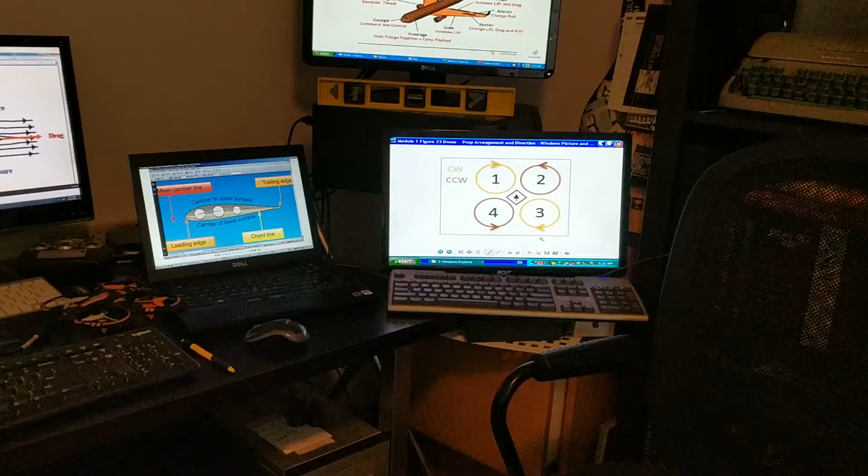Module 1, Aerodynamics. So, on the very start, we would like to let you know aerodynamics is more like the underpinnings of aviation.

And having said that, I'd like to ask this question, but please don't sue me or take me to court. Have you heard this saying? If you ask a bank robber why he robbed a bank, he replies, that's where the money is. With drone development happening by the minute, I would say aviation is where the money is.

And having said that, I'm going to give you another example. I know you are my students and not my wife. She would tell me, why don't I get into the subject rather than going into a tangent? But this is important.

What have you heard about the reputation of a commercial pilot? I'm not talking about the prestige part of it, but the work ethics, accountability, discipline, and skill set of a commercial pilot that has made a mark in society.

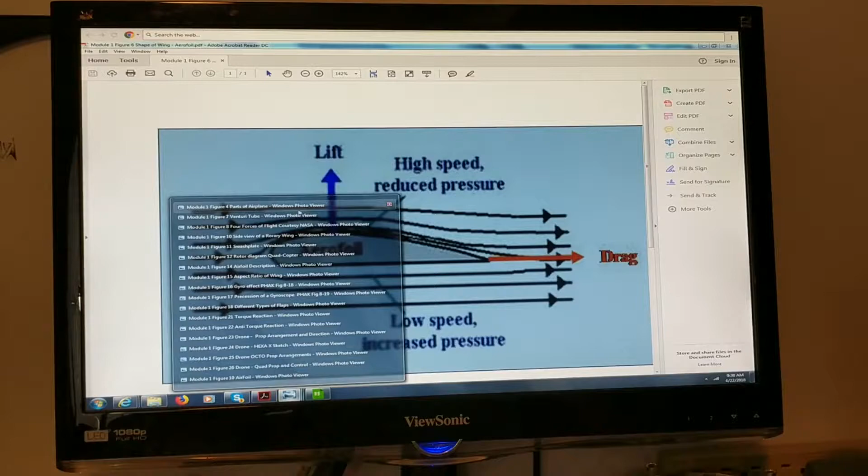Figure 4, once again, like this you may not see perfectly, but you would see in figure 4, airplane parts. This is a NASA image, and we'll be describing that in a lengthy way.

Different parts of an airplane, or different gadgets, or different surfaces - we'll be going into detail on that through different figures. Figure 5 will cover different names of activities, controls, and other descriptions, so that any identification given, all students would know what we're talking about. Figure 6 has the shape of the wing.

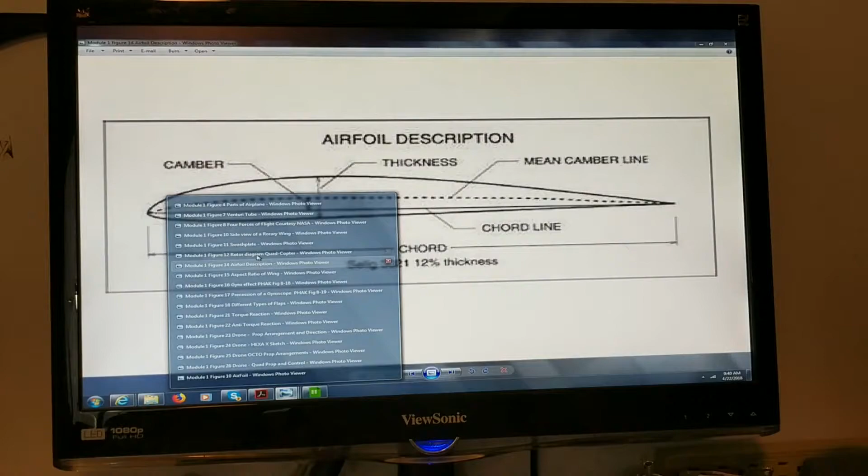Shape of the wing - we'll be dealing with that at length.

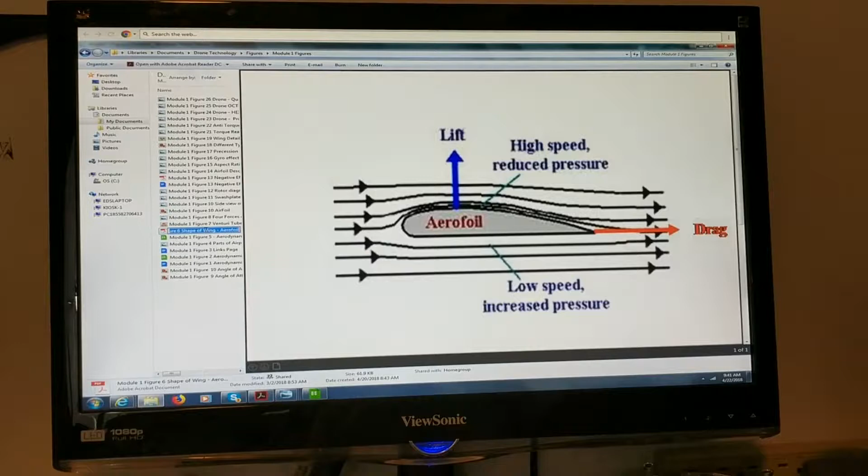And figure 7, that's the Venturi tube.

Figure 8 shows the four forces of flight, which we have to deal with at length.

Figure 9 deals with the angle of attack.

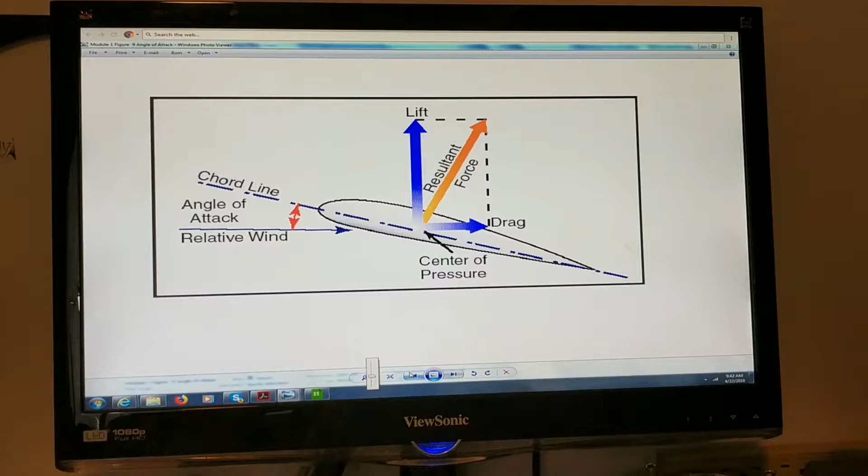Figure 10 shows a side view of a rotary wing on a helicopter.

Figure 11 shows the swash plate, which we will deal with and understand in a proper way, with a solid understanding - we need that.

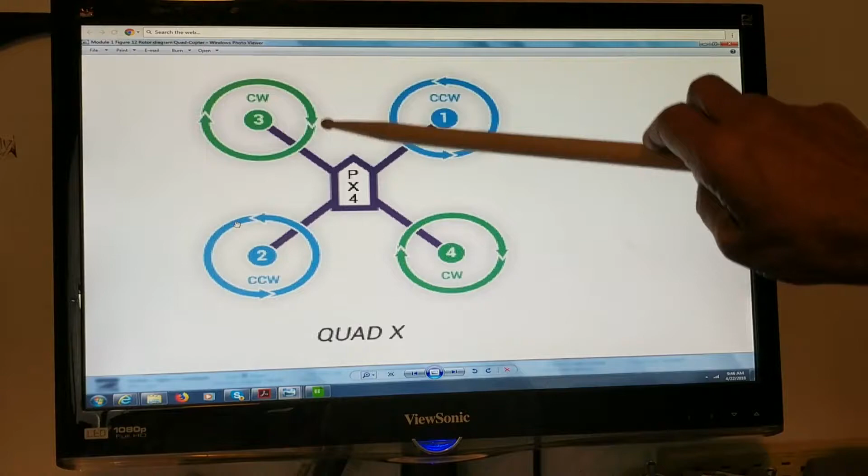Figure 12 gives a rotor diagram of a quadcopter, indicating the directions - we have another diagram coming up later. Rotor number 3 and rotor number 4 are clockwise, while rotors 2 and 1 are counterclockwise. We'll get into that as we go on in the course.

Figure 13 lists the negative effects of excessive weight, which we will discuss through and through.

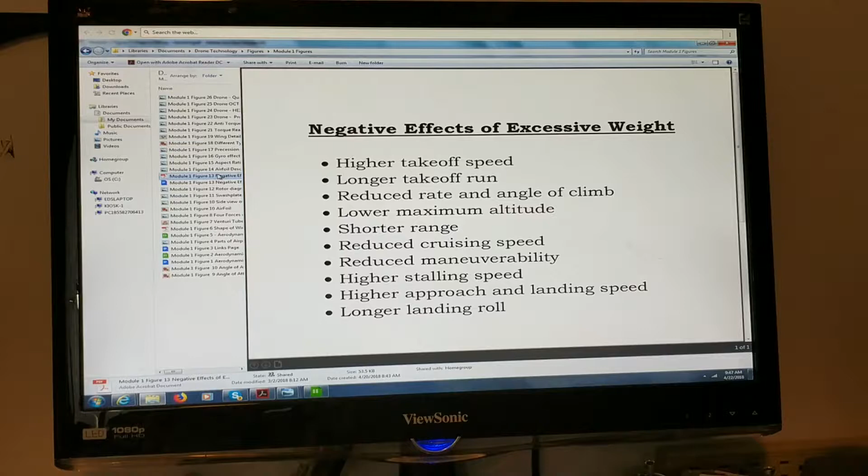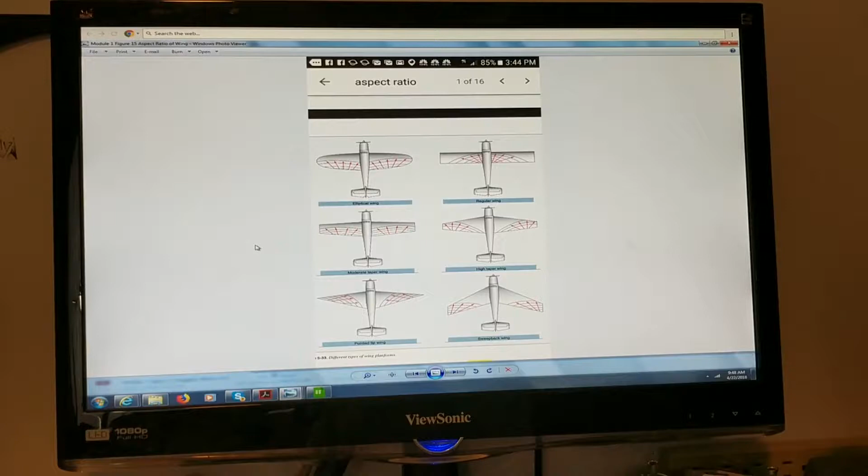Figure 14, once again, covers the description of the airfoil and understanding these names: camber, thickness, mean camber line, and chord, etc. Figure 15 will show the aspect ratio and different wing shapes - a detailed discussion would be done with that.

Figure 16 shows the gyro effect, which we'll deal with, and figure 17 shows the precession of the gyroscope.

Figure 18 deals with different types of flaps. Figure 19 will have the cross section of the wing with more identification when dealing with the angle of attack. These names will keep coming up.

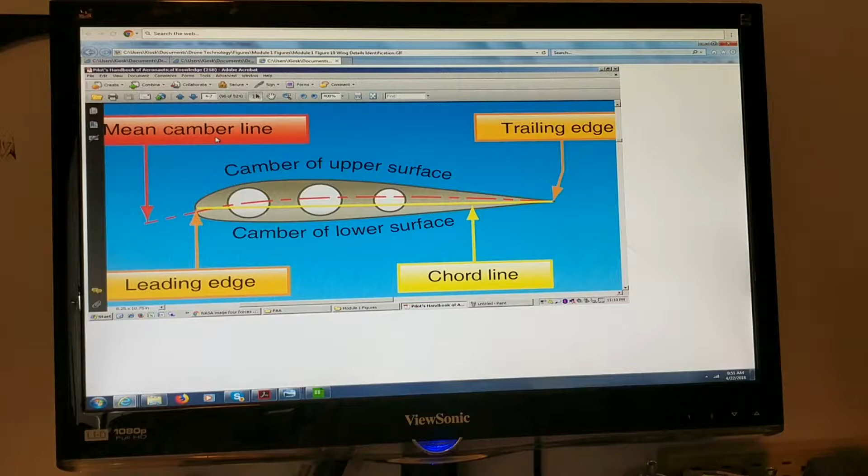Figure 20 shows the adverse yaw.

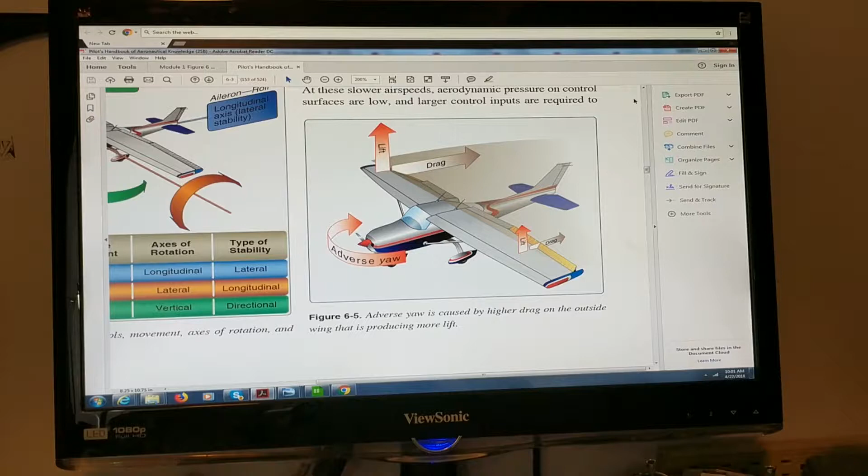Figure 23 is helpful to understand how the props or motors on a quadcopter are arranged to rotate in clockwise and anti-clockwise directions.

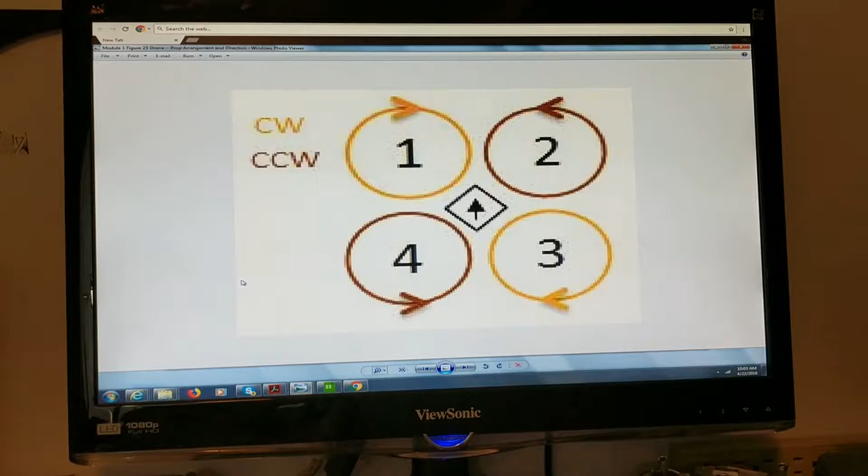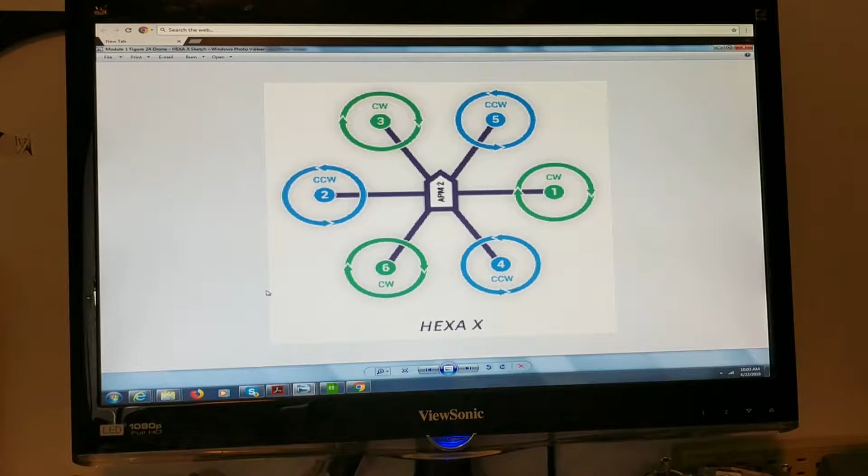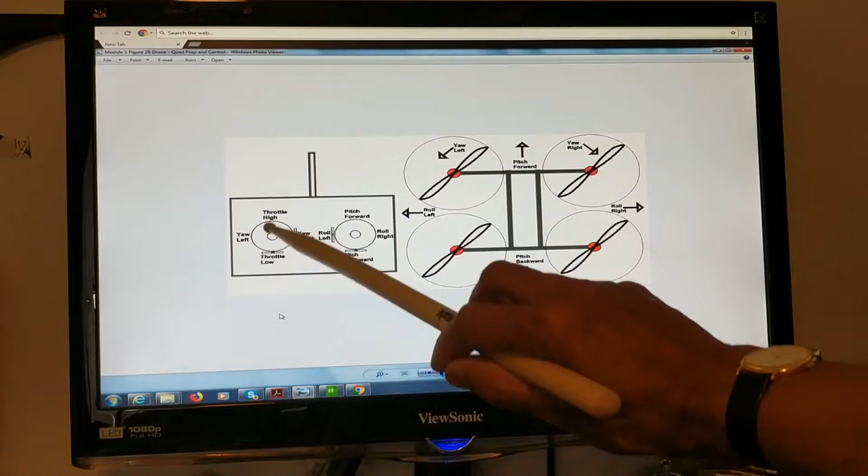The last one, figure 26, shows the arrangements of the controls and props of a quadcopter in the mode 2 arrangement - that's the more common one, though most controls now are switchable between mode 1 and other modes as development happens rapidly. Here, if you observe, the throttle is on your left hand side, and we're going to get into details of that.

As we start, there are a few basic things we have to cover, mainly Newton's first law and Newton's third law of motion. The first law says all objects remain at rest or travel in a constant path at constant velocity unless compelled otherwise by forces acting on it. Newton's third law states that every action has an equal and opposite reaction.

We have to couple this with Bernoulli's theorem and the Venturi tube to understand how the shape of the wing and the pressure difference between underneath the wing and on top of the wing help an aircraft take to the air. It's also equally important to understand pressure - it's very interesting.

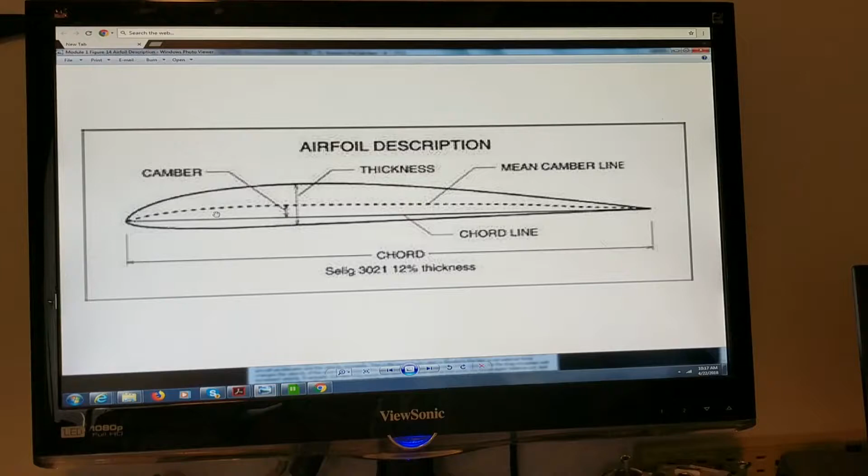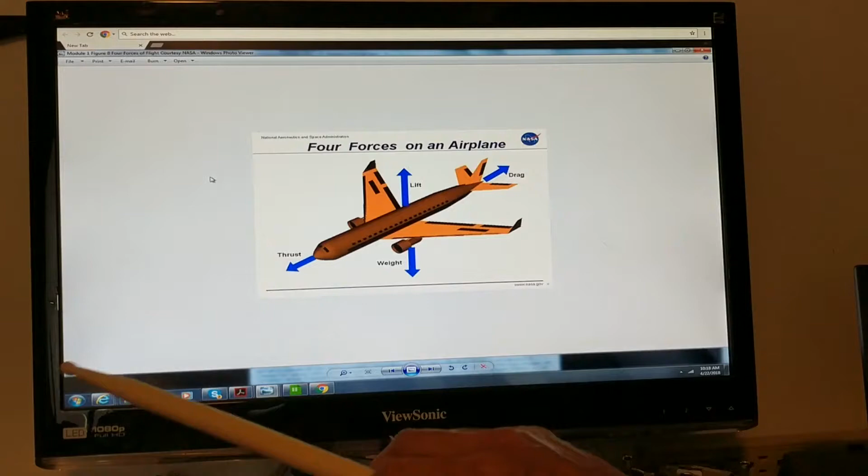If you see the four forces, you've got the thrust coming this way when the plane is flying forward, and it has to battle the drag. We'll be dealing with the drag in so many different forms that exist in an airplane, it has to deal with. And then invariably the weight is there of any object. So against weight, you have to have the lift working to get it airborne.

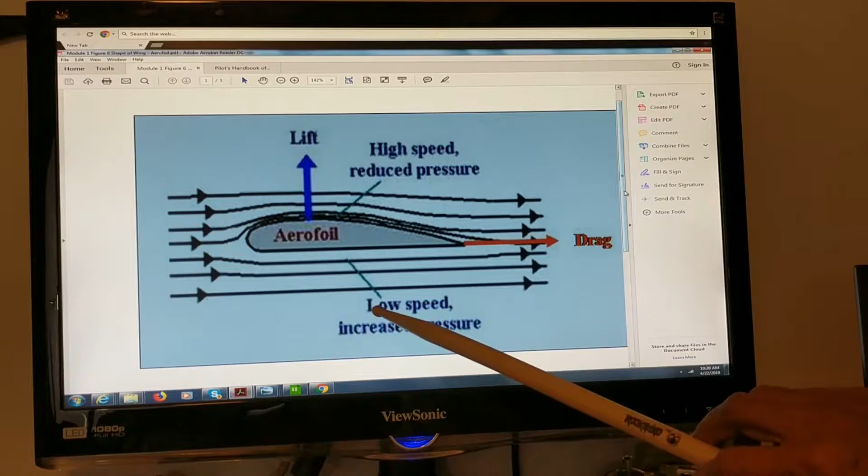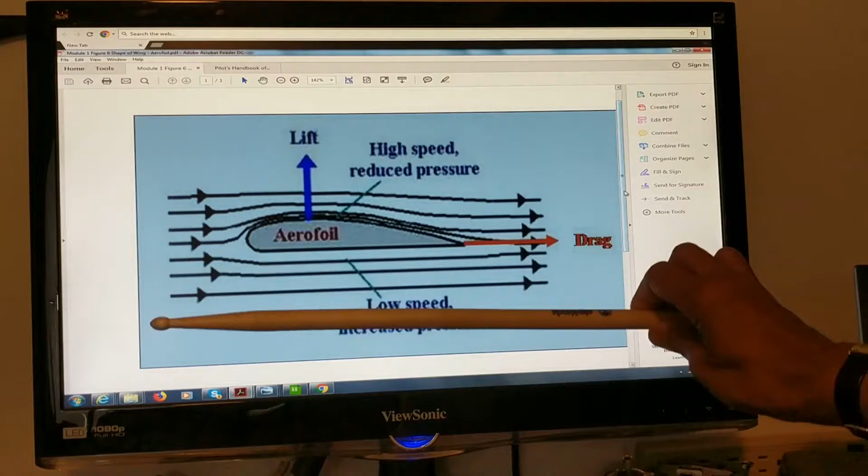Then once again, I'm going to flip into another diagram of the airfoil. Ladies and gentlemen, as said before, the shape of the wing is a large part of what helps a fixed wing aircraft get into the air. See how it is marked: increased pressure underneath, with low speed, and above it's reduced pressure and becomes high speed. In other words, that helps the wing to get lifted and also tilt it a little bit, so that when you move forward, it makes it easier to take to the air.

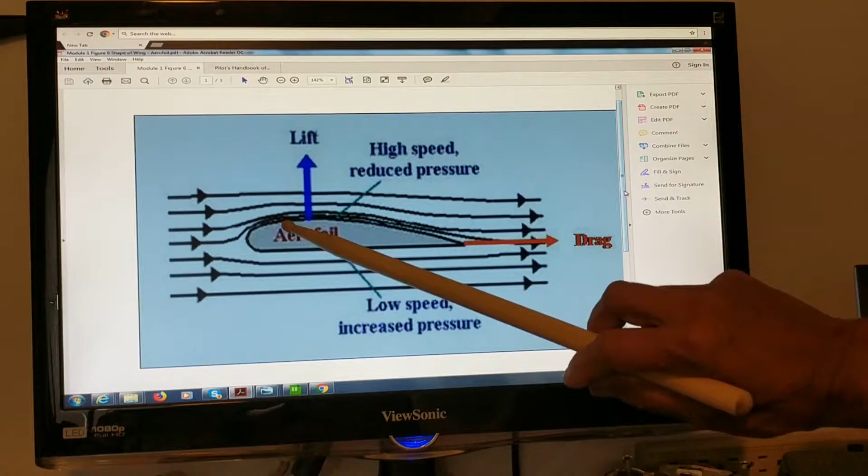And on these layers, we are going to discuss more on the shape of the layer. There are two layers, in fact three layers, or the boundary layer. There's something happening to the boundary layer. We want to keep it what you call a laminar layer on the boundary layer, but unfortunately at one stage it becomes a turbulent layer, which is problematic. The designers of the wing always try to keep as much as possible the top layer of the wing as a laminar layer.

But then at a later stage we will be dealing with angle of attack and the stall. In fact, when we do Module 8, where we detail and prepare students for the remote pilot license, it is imperative that you understand the angle of attack and the stall situation, because FAA protocol demands that you understand it. I'll assure you there's definitely going to be two questions on that.

And it's almost like FAA tells you don't even come anywhere near aviation if you don't understand these two. All hell breaks loose if you don't understand the angle of attack and stalling. I hope FAA will not take notice of how harshly and aggressively I put this, but it is important that students understand those things thoroughly, so that there is no need to second guess.

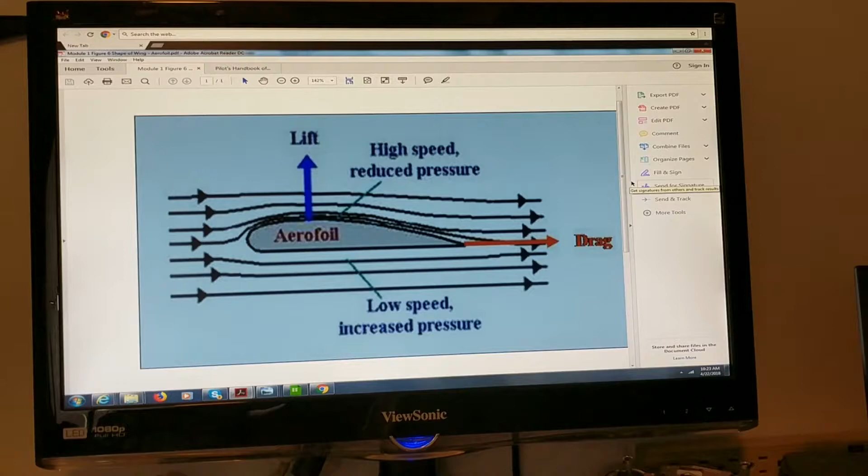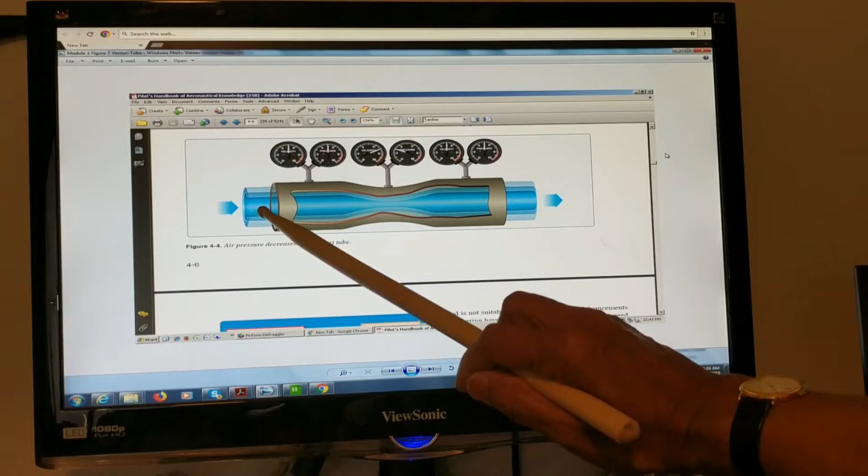So then, what does Bernoulli's theorem tell us? On figure 7 we see the Venturi tube. It could be air, it could be fluid. The same thing happens: if the diameter where you send the air or fluid is at one level here, and it is lower at a middle position, as the pressure becomes lower at this point, the velocity becomes higher.

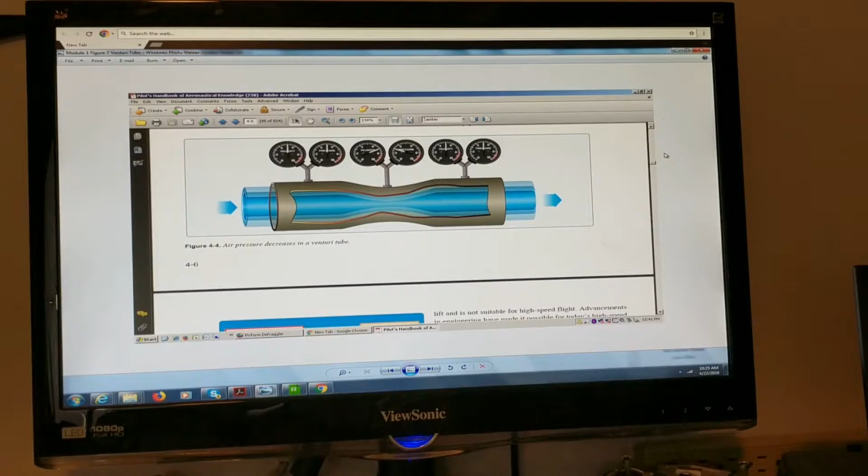So that is the Bernoulli theorem, defined and displayed on the Venturi tube. I'm sorry, we have to go back and forth - that's the nature of understanding aerodynamics, how it works. So I have to get back to this four forces of flight diagram to explain to you engine thrust and the drag.

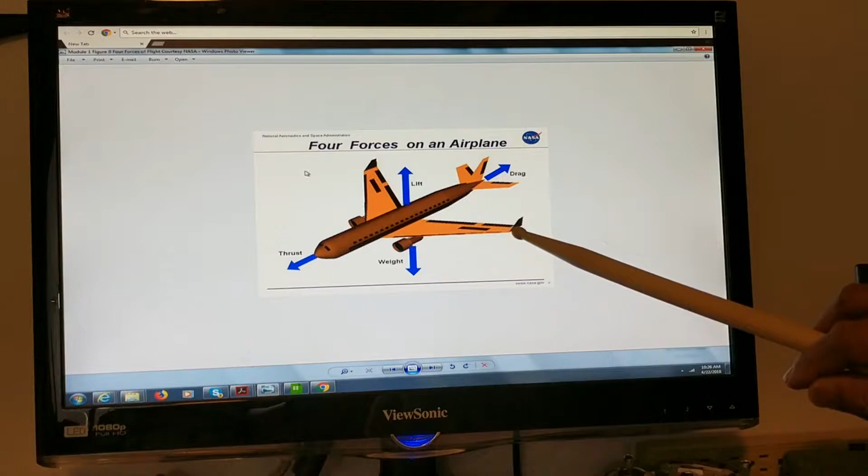It's the engine of the plane - it could be propeller, it could be turboprop or jet engine - that makes you move forward. You're fighting the drag. So thrust of the engine, we've got to remember how that works, and let's get into the next part.

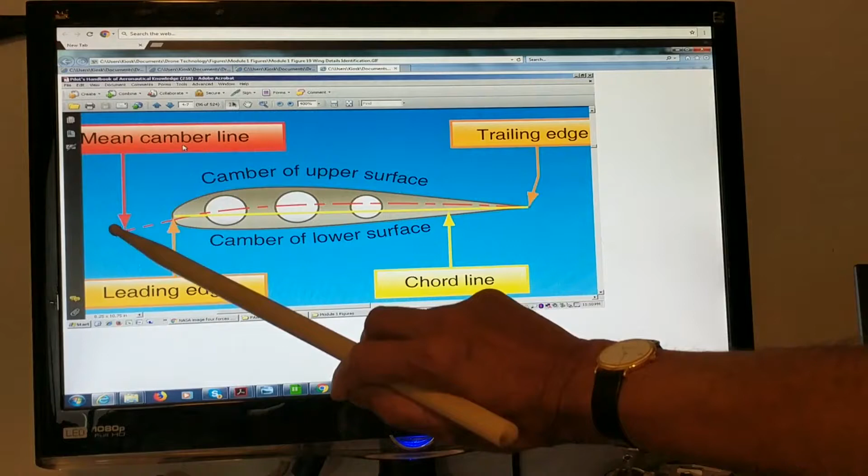Here's another diagram to show the chord and camber line, figure 19. You see the mean camber line - it's a curved line between the leading edge and the trailing edge. You've got the leading edge over here, trailing edge over here.

Camber of upper surface, camber of lower surface, and chord line is not the curved line but a straight line.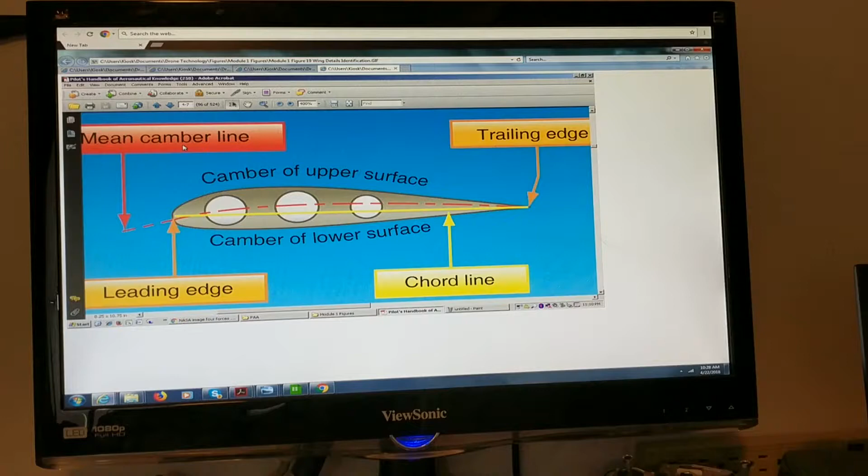We have this as figure 19 on our own website, but it's originally from the FAA's Pilot's Handbook of Aeronautical Knowledge. That's actually where we downloaded it from.

Once again, we should have a solid understanding of the identification and definitions of these different descriptions. Let's try to understand all these parts and surfaces, or gadgets if you may call them, on the airplane, so we get a better understanding of aerodynamics.

You have ailerons on the wings, which the pilot moves around to change the roll. I would also show this along with a nice little model aircraft I ordered from Amazon Prime. It hasn't come yet, but even if you think about a drone, the aileron effect on the airplane is the roll effect, like it banks this way or that way. That's the aileron effect.

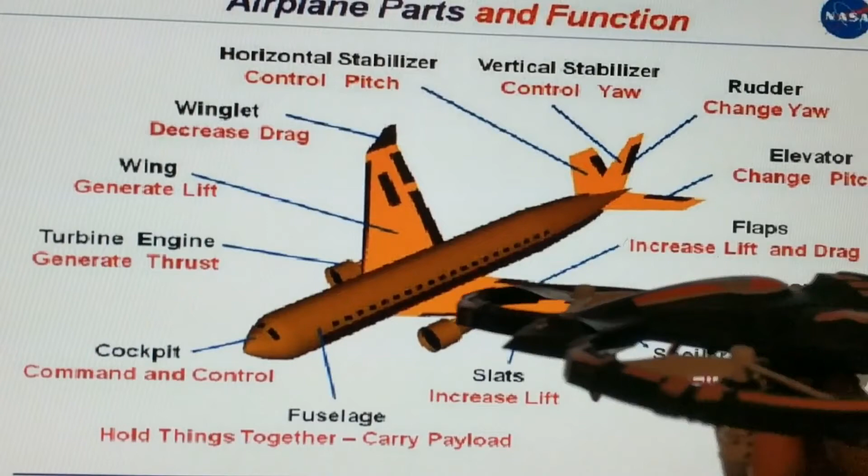The rudder movement is the movement on the vertical axis. In other words, whether it's a plane, a helicopter, or a drone, we're talking about movement on the vertical axis, like this. And pitch, I forgot to mention, is the movement on the lateral axis, in this direction.

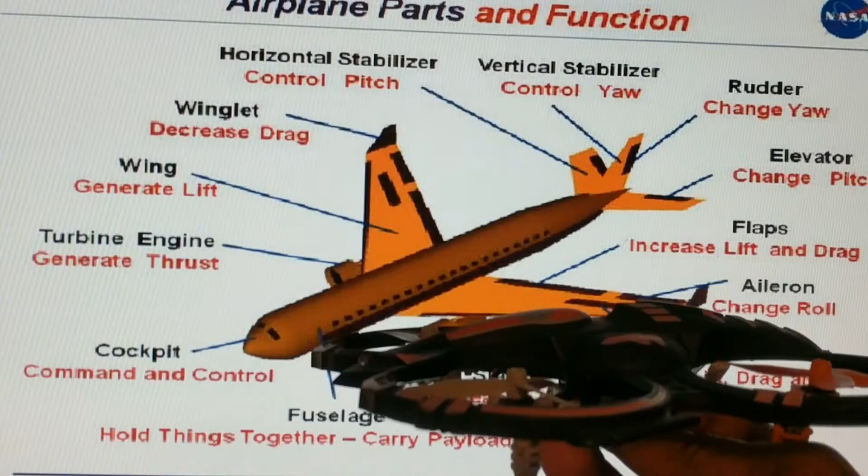Forgive me if I'm not pronouncing that word properly, longitudinal axis. That is rolling this way and that way. So those are the different movements of the plane needed to maneuver it.

I also want you to observe this winglet, which decreases drag. Initial planes did not have this winglet, but if you fly any commercial plane today and sit near the window, you will definitely see this small jutting out portion at the end of the wing, where designers had to deal with what they call wingtip vortices, and that's how they at least got it under control. We'll have a long discussion on that too.

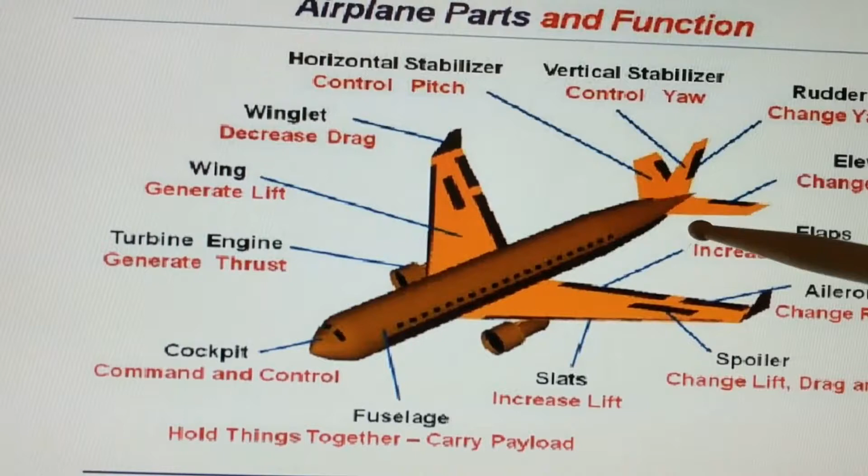Let's move on. I also want you to observe the horizontal stabilizer and the vertical stabilizer. The horizontal stabilizer is where the elevator is mounted, and the rudder is mounted on the vertical stabilizer. Some planes have a V-shaped tail end that acts as both the vertical and horizontal stabilizer.

At this stage, I want you to understand what they mean by adverse yaw. When the plane is rolling in one direction, there is a tendency for it to change on the vertical axis, that's a yaw change in a different direction. In other words, the plane is trying to bank towards the left hand side, but the pilot has to make sure there's gradual control.

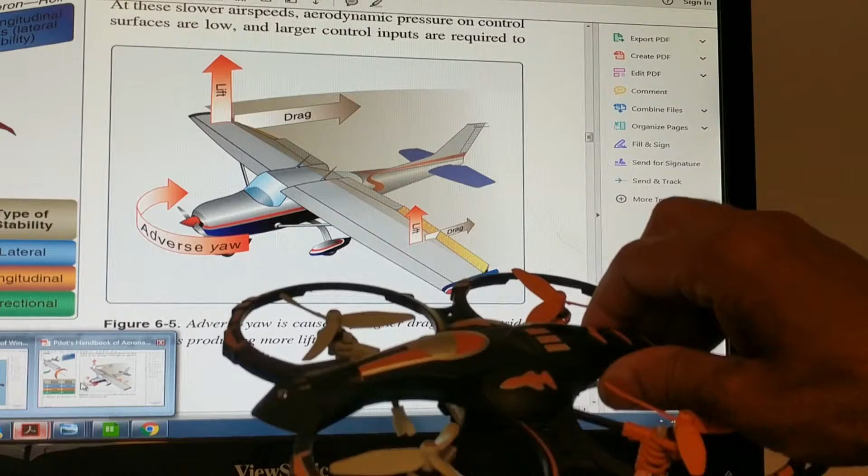By putting the controls in a way that smoothens your banking, because there is this adverse yaw effect where it tries to swing on the vertical axis in the other direction, like it tries to change on the reverse direction.

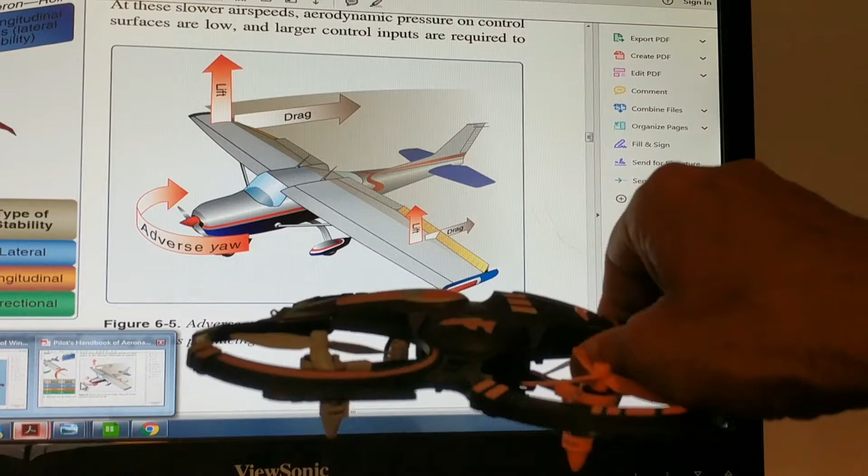We were talking about drag, and the thrust of the engine pushes the aircraft forward, fighting the drag. We'll be talking about a number of different drags that affect a fixed wing.

There is one definition called form drag. Form drag is present due to any shape of the aircraft, there is a certain amount of drag depending on the design, of course designers try to make it as little as possible so it's easier to take off and be in flight. Form drag, you can call it the shape drag, is present because of the shape of the aircraft.

And induced drag, as we discussed, the wingtip vortices are due to induced drag, and we discussed how designers have lately minimized it because of new designs.

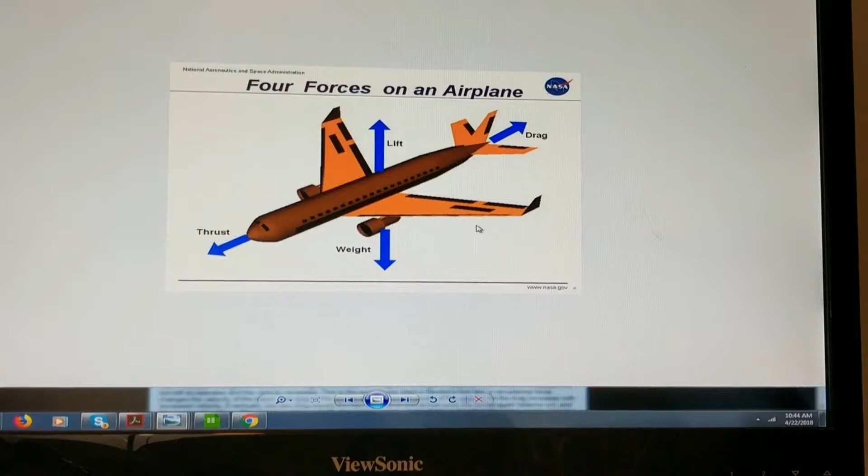Speaking of new designing, just a few months ago I saw a NASA head giving a lecture on the idea of getting rid of the whole fin. If it's a jumbo jet, you're talking about removing about 8 tons from the plane, because he was explaining that if birds do all their flight maneuvering without a fin, we should be able to do that too. Why I'm bringing this up is that development keeps happening, forever trying to improve flight methods and conditions and make it easier to fly.

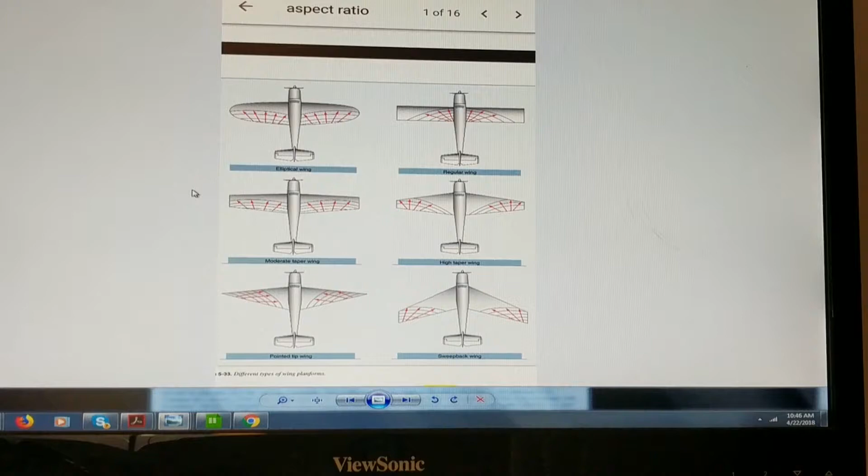Getting back to drags, the next type of drag we'll talk about is induced drag, and designers control that through the aspect ratio, which is the ratio of wingspan to wing chord. Designers also have to grapple with the fact that a larger aspect ratio may require making the wing larger. If the wing is larger, there's more weight, so it's a give and take between those two factors. That's why you'll find different shapes of wings, designers factoring all that in to make it as efficient as possible.

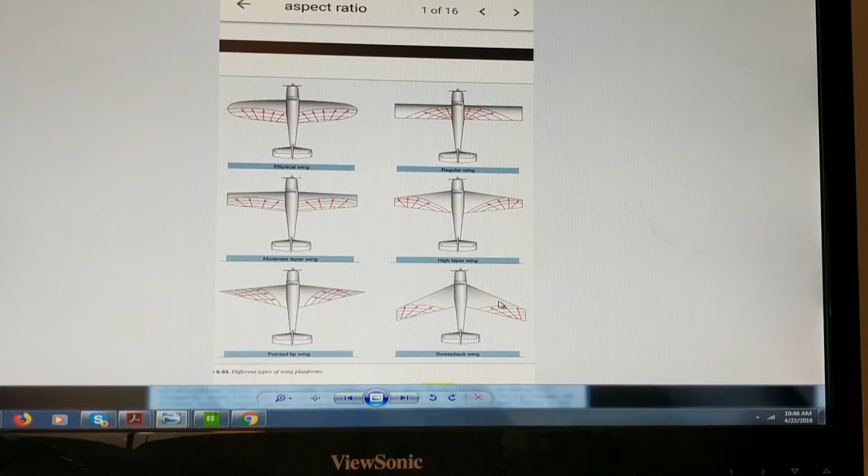Another important thing regarding drag is skin friction drag, mainly in countries where you have to endure winter. If snow builds up on the wing, that's definitely not helpful for the plane to fly. So when you have a very smooth surface, you only get a very little amount of skin friction drag.

What is the other drag we'll have to deal with? How about the antenna masts plus the wheels, undercarriages - all those bring in drag, so that is known as parasitic drag.

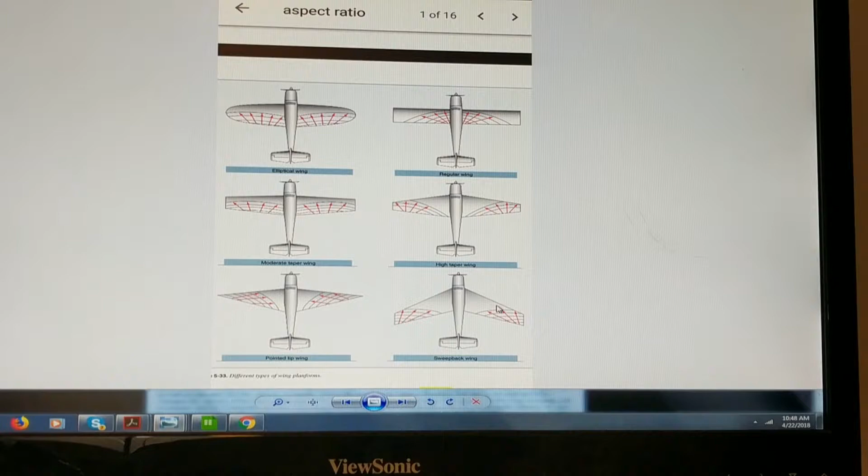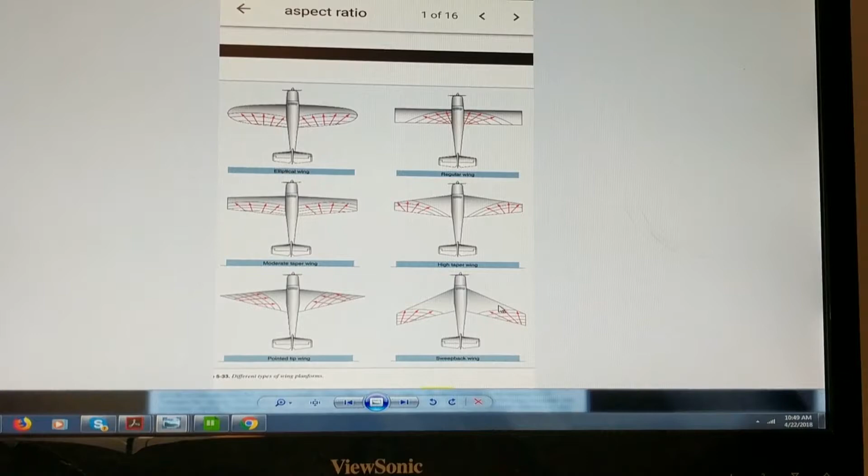There's also another thing we need to deal with, which is slipstream, mainly from propeller aircraft. Wind, with the rotation of the propeller, keeps hitting the fin of the aircraft, so there is a tilt factor, at least at the fin and rudder. So a certain amount of tilt is done to the fin to offset that situation. This mainly affects single engine aircraft - if it's a propeller engine, the effect is more. But if it's a twin engine or four engine or multiple engine aircraft, the wings will balance out that slipstream.

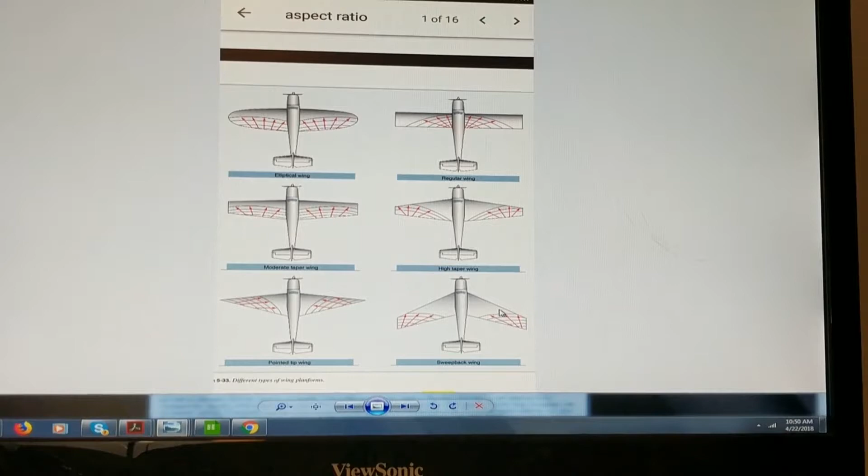How about jet engine aircraft? There are single jet engine aircraft like fighter planes. I know Jet Provost used in the RAF, Royal Air Force, that was in service from '54 to '67, I think. But the intake is on two sides of the fuselage, and on that plane you don't really have to deal with that kind of slipstream, because the exhaust goes out beyond the fin. So that takes care of that situation.

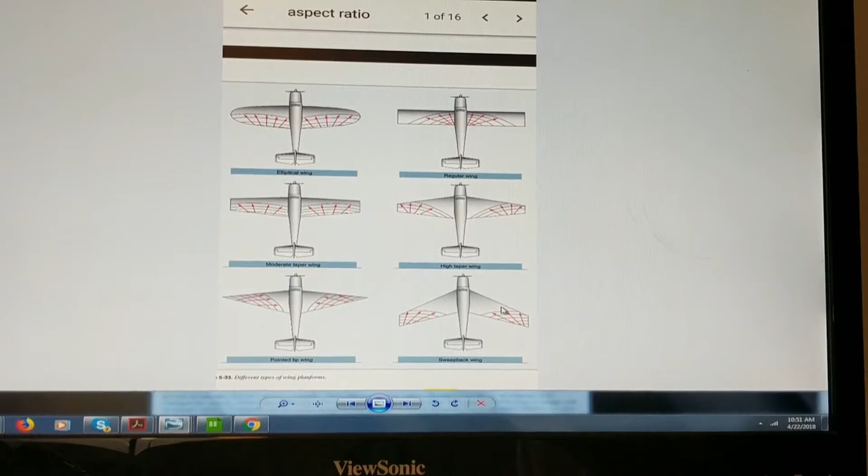Now we discussed the longitudinal axis, lateral axis, directional stability, directional axis - that is the yaw. I want to bring up another diagram here - this is figure 6 again, the aerofoil.

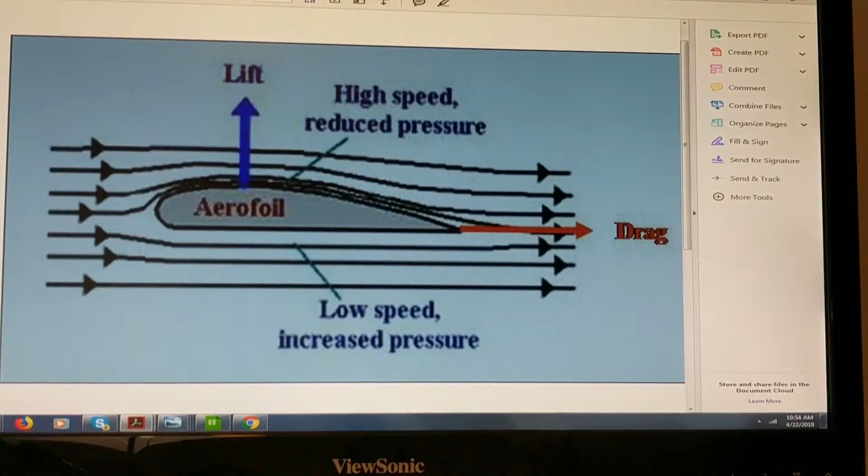On this, again, I want to get your attention on the center of pressure. Designers want to keep the center of pressure as much as possible on the laminar layer rather than going into the turbulent layer. Also the center of gravity, and how that affects the flight - I'm going to show that also.

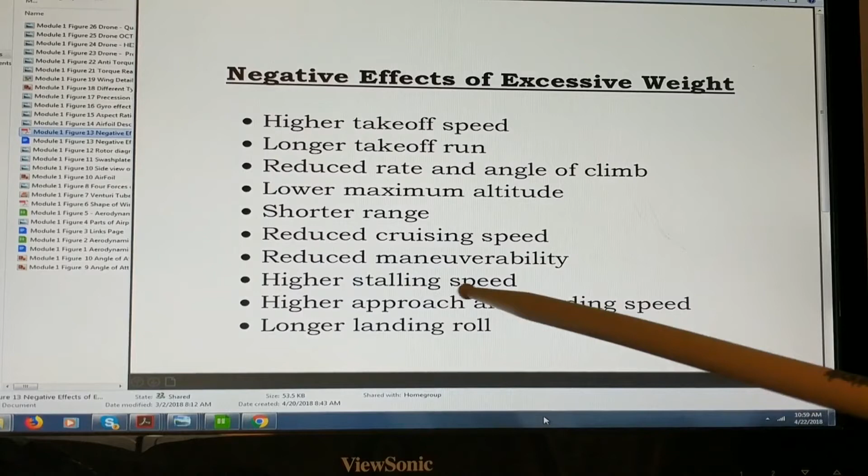These are the negative effects of excessive weight. Some of them, just like common sense, are: higher takeoff speed, longer takeoff run, reduced rate and angle of climb, lower maximum altitude, shorter range, reduced cruising speed, reduced maneuverability, higher stalling speed, higher approach and landing speed, and longer landing roll. It's important to remember these factors too. That is figure 13 - we have that list.

Let's go into more definitions of words. Whenever you hear 'relative wind,' that is parallel and opposite to the flight path - you've got to always remember that. We dealt with the aspect ratio. And one other factor easy to understand is that lift acts against weight, so an aircraft cannot leave the ground if the weight is more than the lift.

With the wing effect, pressure underneath the wing and above the wing, we get to a situation where the lift is more than the weight, and that's how a plane gets airborne, as I keep saying.

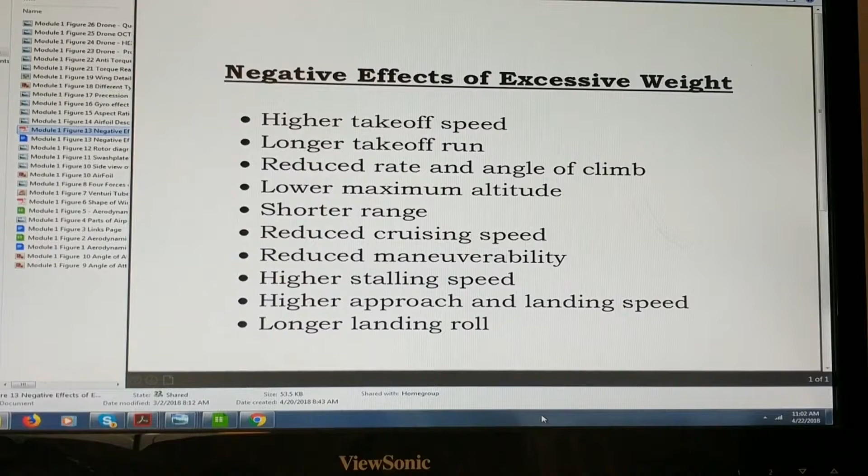On angle of attack, pilots always try to keep it less than 15 degrees without exceeding the danger area.

I'm sure now when you fly on a commercial flight or even a private flight, if any of your family or friends take you in a Cessna or something, you will see these flaps. The pilots move the flaps around. You see so many different types of flaps: plain flap, split flap, slotted flap, Fowler flap, and then fixed slots.

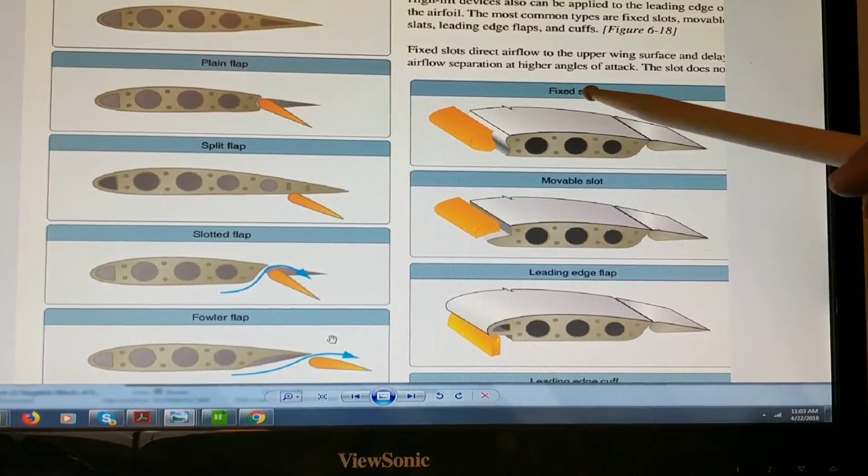What is in front is, again, pretty much helping to maneuver: fixed slot, movable slot, leading edge flap. So those are different secondary controls that are very useful for pilots to maneuver the plane in a way that is safe and not a disturbance to the passengers or the pilots.

Speaking about atmospheric pressure or density pressure, you will hear the figure 29.92. That is the pressure at sea level that will come over and over again, even on air traffic control. So it's very important to remember that.

On the design of wings, yet another name I would like to present here is the dihedral design of the wing. In other words, at the end of the wingtip, the wing may be slanted towards a higher angle, at a higher position than the start of the wing. That's again relating to induced drag and to reduce the vortices.

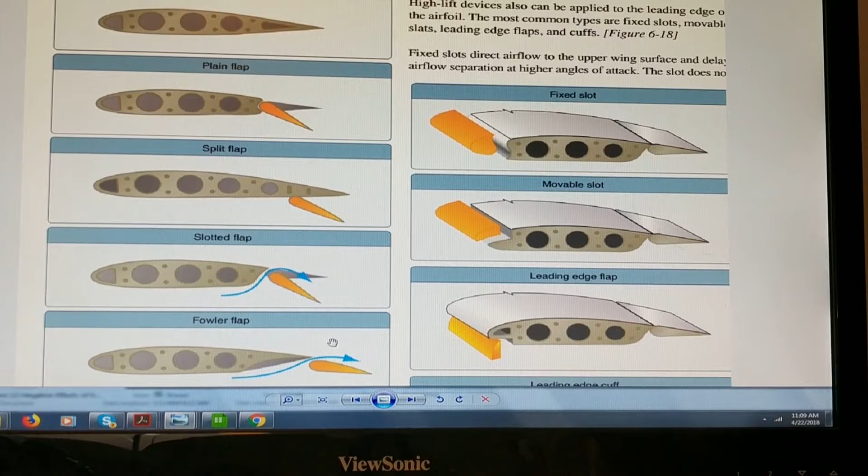And there are spoilers also. Even cars have spoilers, so that's also used whenever you want to change the drag and change the lift. And there's another secondary movement called anti-servo tab, which smoothens the stabilizer movement.

Although we will not be dealing with it at length, you now generally have an idea of what equilibrium is. Any parked aircraft, or one that travels in a constant path in one direction, is then assumed to be in equilibrium - not when it takes turns or rolls. It could also be wind, if turbulent, and then getting back to whichever path without changing directions, you call that the aircraft regaining stability.

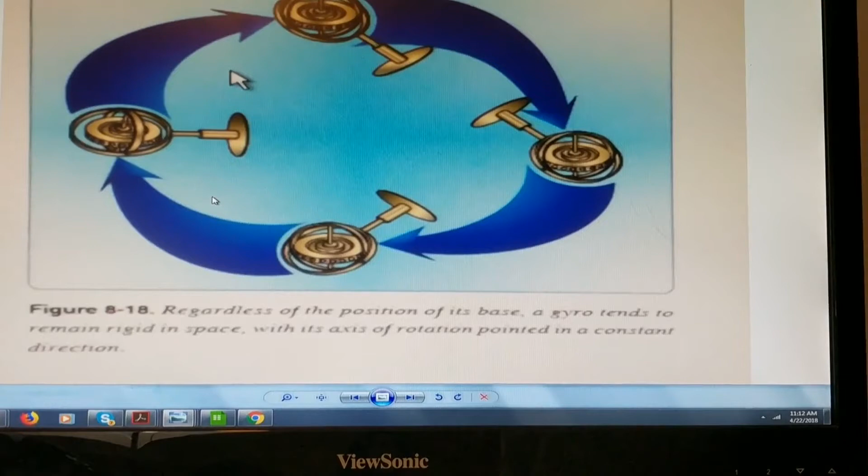Let's turn to figure 16 and talk a little bit about the gyro effect. What we have here is the same thing shown in the Pilot's Handbook of Aeronautical Knowledge, figure 8-18. I really want to spend time on this one, because as drone pilots, you will be dealing with cameras mounted on drones, and that also involves a gyro effect - your gimbal.

In other words, the platform itself will be pivoting and changing directions, but the object will keep the same position regardless of the platform it's mounted on being moved around. This is very useful in flying the plane, in terms of keeping the correct attitude, and at the same time we have to understand that when the engine is moving the propellers, there is this gyro effect, or precession, that we have to deal with.

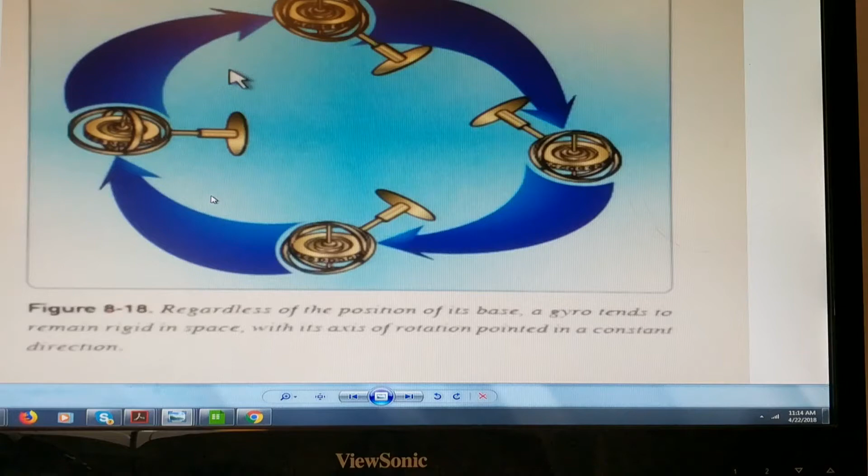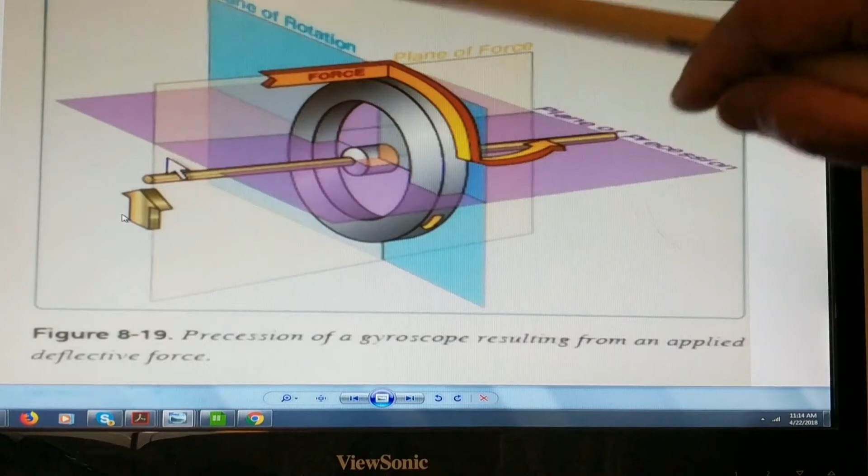I'm going to show figure 17. What this says is, when you apply an external force to something that is rotating, it acts as if that force is applied 90 degrees out of phase, as you see in this diagram. It's very important to understand that as part of aerodynamics, plus in using gimbals and cameras, that comes into play too.

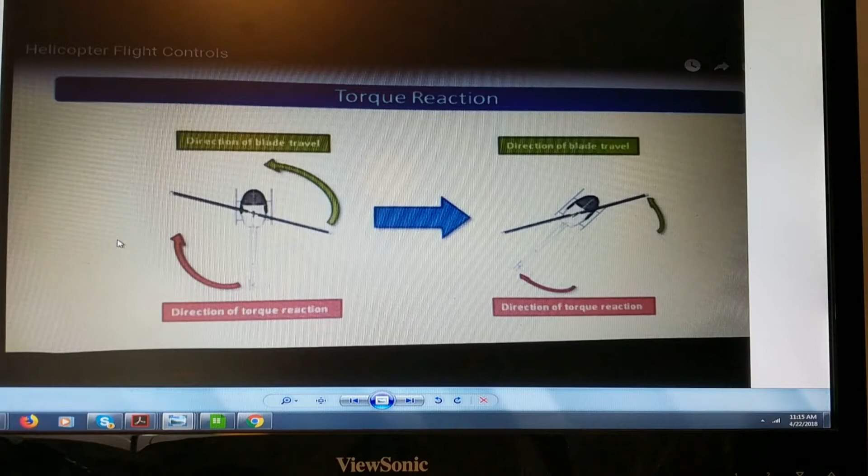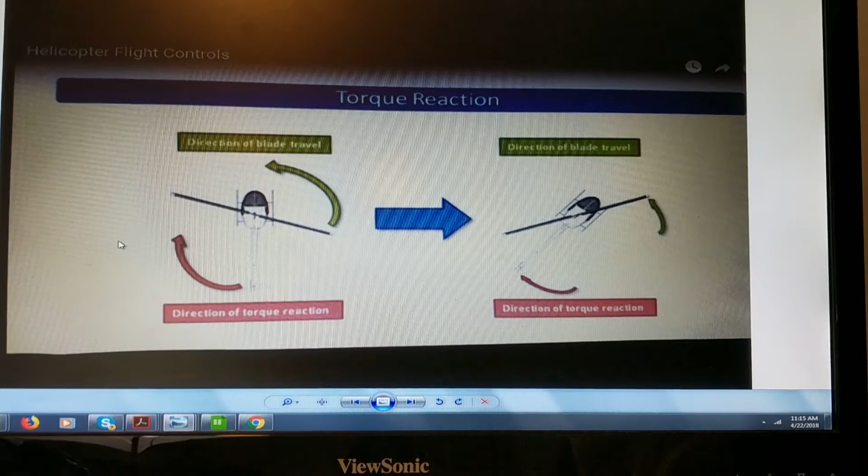Okay, let's talk about torque and anti-torque, particularly in helicopters. Now that we have the basics on the fixed wing, we are not going into too much detail on the helicopter, but I would like to lay out the fact that initially on the design side, designers managed to get it airborne, but it was revolving on its own axis vertically. That's the part designers found difficult to control, and it took a number of years before they came out with the design of the tail rotor, which handles the torque with its anti-torque capability, making the helicopter stable and viable as a flying machine. So those two diagrams, if you look at them, are important to understand about helicopters.

Let's move on to the real subject, drones. Usually when you go from stage 1 to stage 2 to stage 3, it gets more difficult. But starting from fixed wing aerodynamics, then going into helicopters, and getting into drones, it's fascinating. It becomes not difficult, but easier to understand.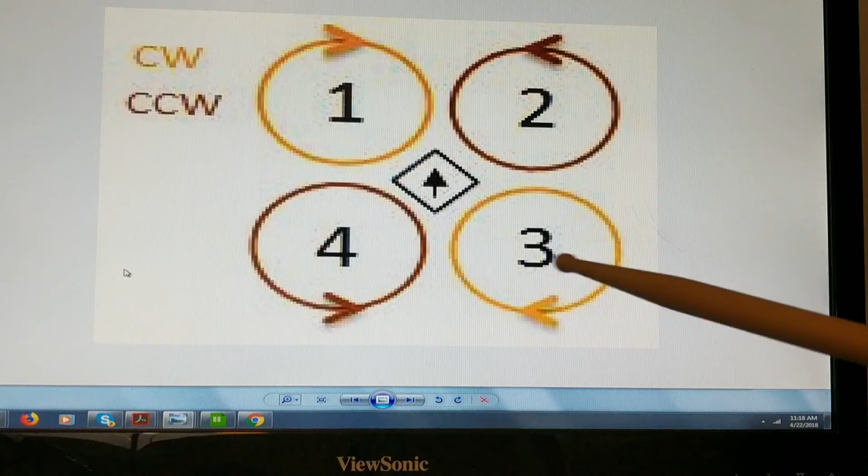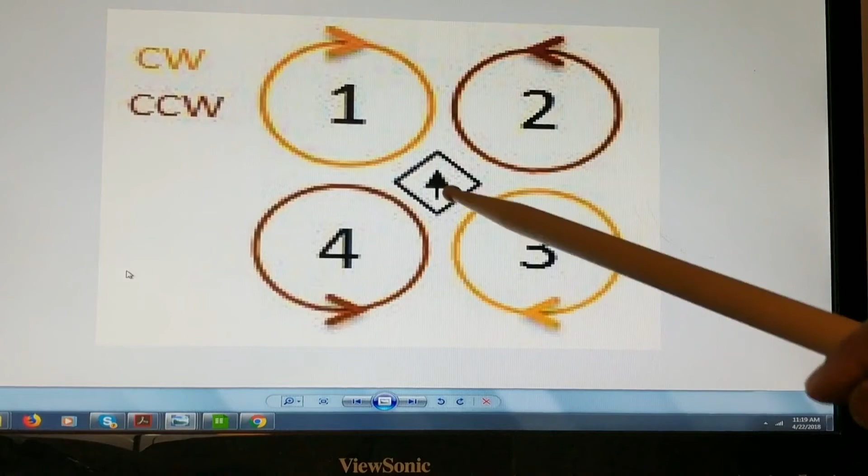See the basic quadcopter, the rotor direction or motor direction, we can easily understand. If you have a quadcopter with 4 rotors, look at this: 1, 2, 3, 4 rotors. What is diagonally 1 and 3 goes clockwise, and 2 and 4 go the other direction, and attains stability.

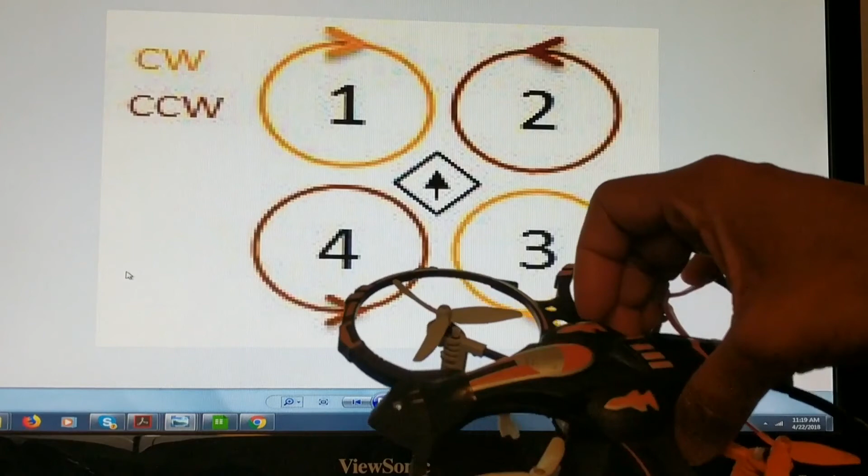And then of course you have all the movements. You can do the pitch to climb, and roll on the longitudinal direction, and then you can get the rudder effect, changing it on the vertical axis.

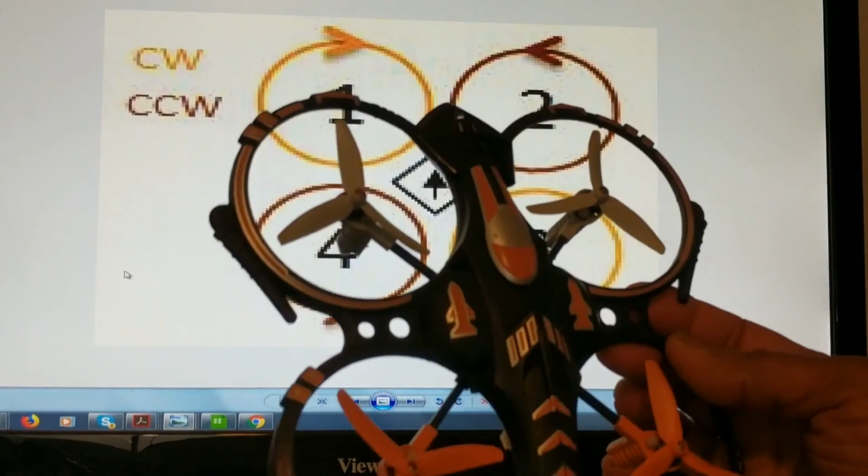So how does the drone achieve all that? Just with 4 rotors, changing the speeds, you can achieve all that. In other words, you can achieve pitch function, roll function, and yaw function. All the functions could be achieved just by changing the speeds of the motors. So thereby we're doing all the maneuvering.

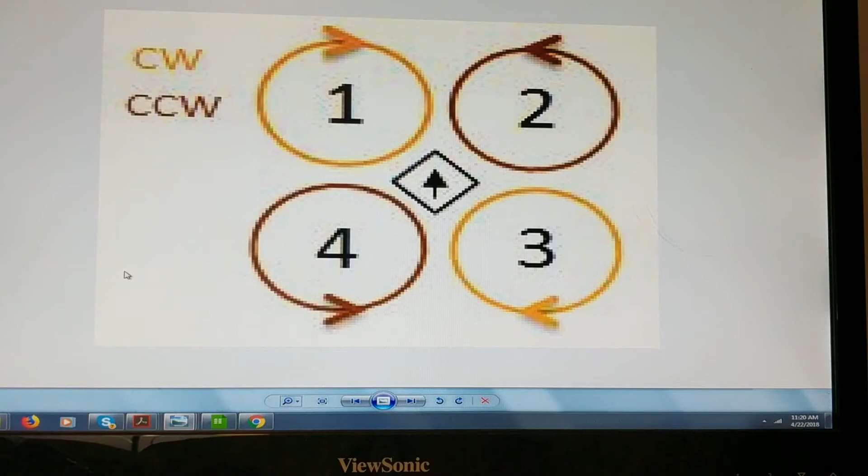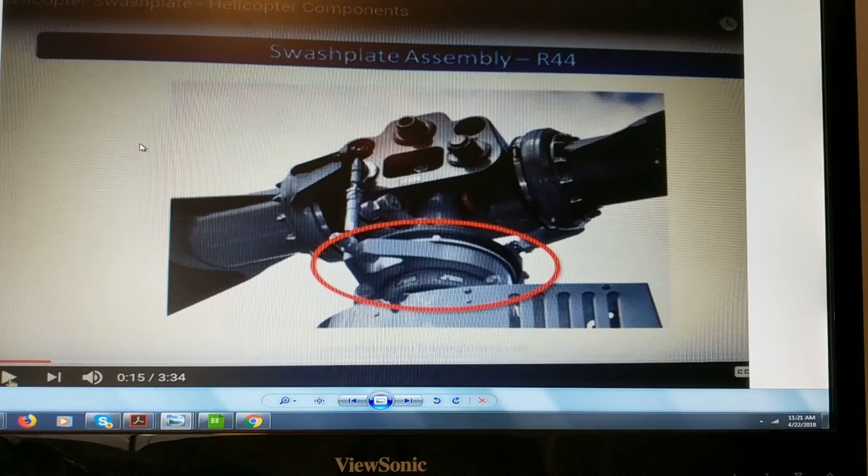Ladies and gentlemen, you know what I forgot? I have to bring up this diagram, figure 11, the swash plate. In a helicopter, to get all this maneuvering, you have to seek the help of the swash plate. The blades, the rotor, is revolving at such a high RPM, and at the same time it has to change the pitch. So changing the pitch with such a high RPM means the material has to sustain so much stress. Now you got the picture.

On drones, you eliminate all that because there is no swash plate needed. Just change the speeds of the motors, and you achieve everything without that strainful mechanical activity that you have to perform on a helicopter.

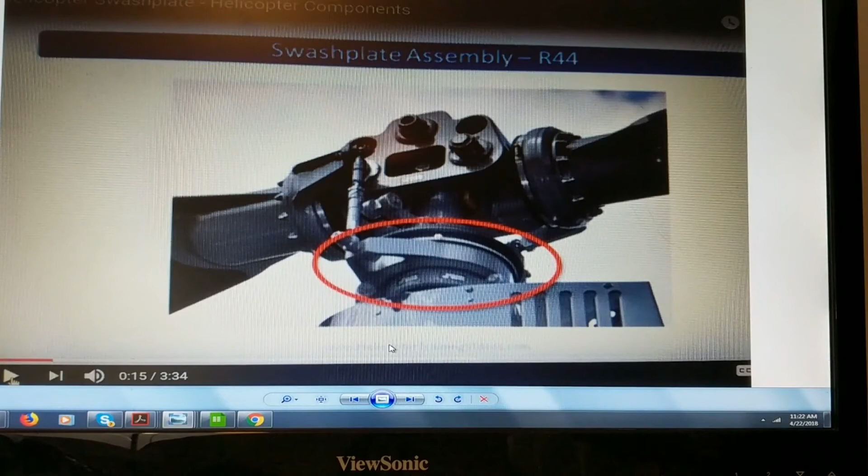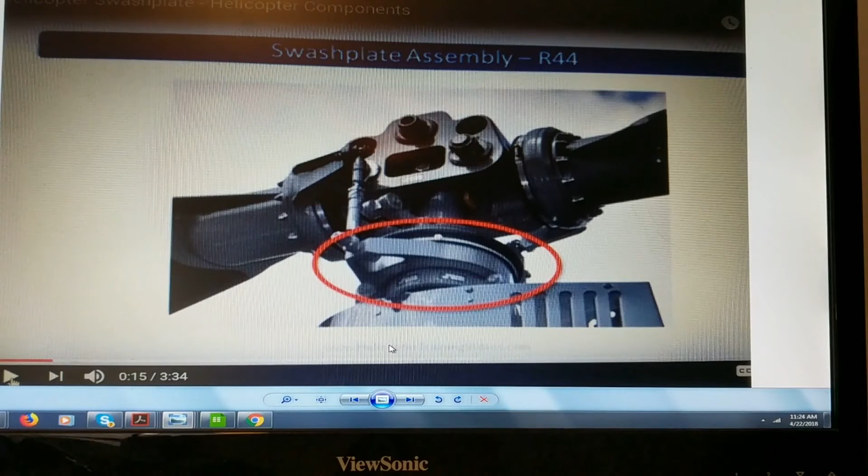Speaking of that, it brings me to the shape of the blade and the word pitch. Like when we were describing the word pressure, it means the same thing but is applied to describe different situations. Like pitch - if you check the dictionary it will say one meaning, but when it comes to the pitch of a helicopter, fixed wing plane, or drone, we have to understand something very particular to wing pitch. I'm going to show that in a very simple, rudimentary way. Just bear with me.

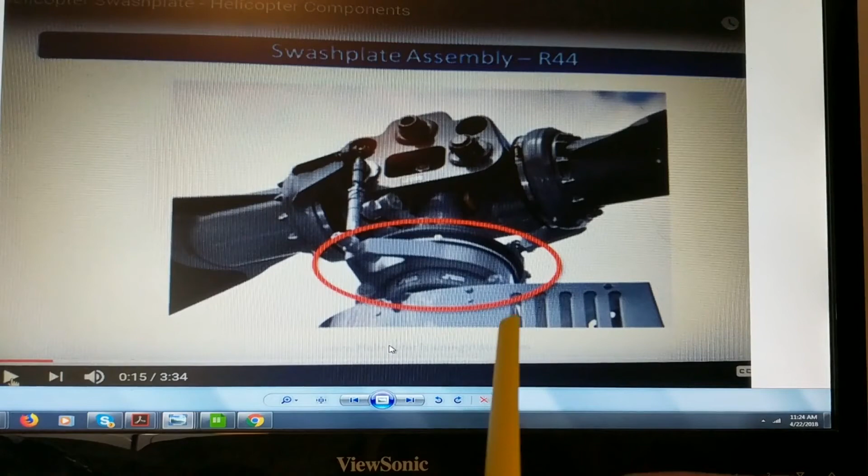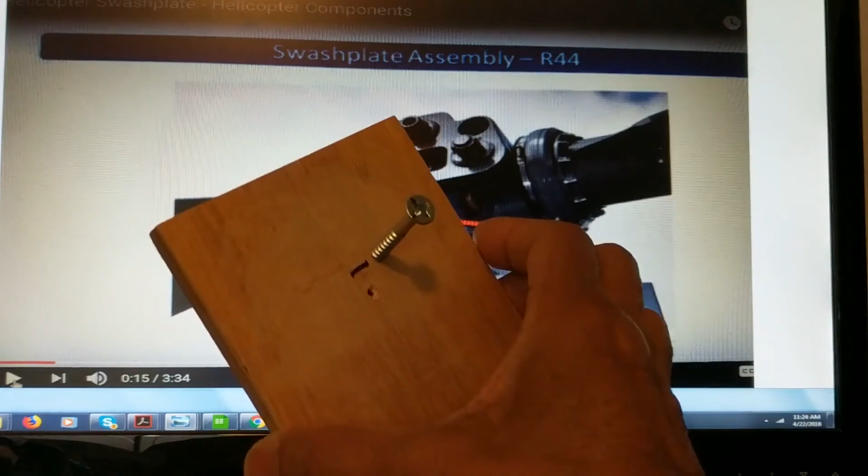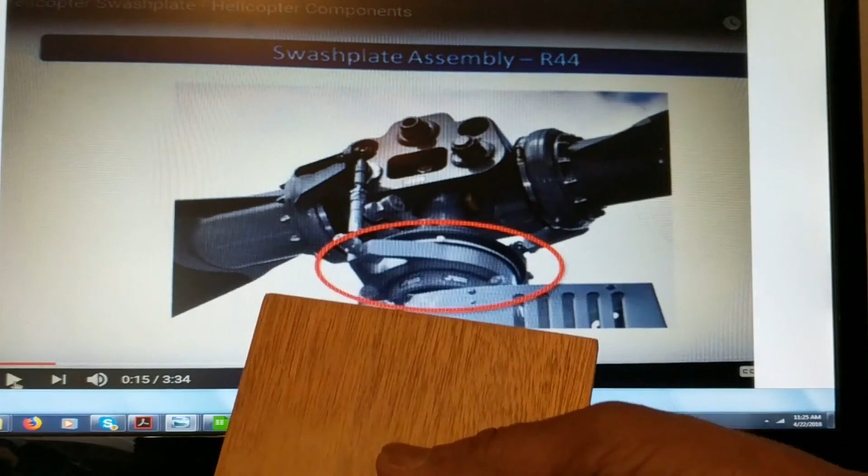See what you see here? Just a piece, a nail put into a piece of wood. At the moment there is no jutting out portion from the surface of this screw. What I want to do is turn it 360 degrees. Go round, go round, go round, go round. Now I have turned 360 degrees.

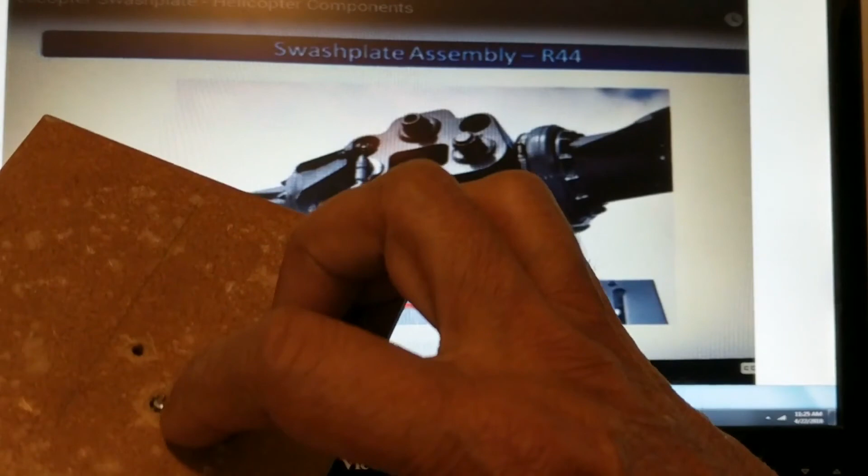So what pitch means for a blade is how far forward it came. It has come out a tiny bit, maybe 1 millimeter, or 1/8 of an inch in the United States. That is what it refers to, the pitch of a blade. Doesn't matter whether it's a fixed wing aircraft, a helicopter, or a drone - when you talk about pitch, that's exactly what it means. So we got that out of the way.

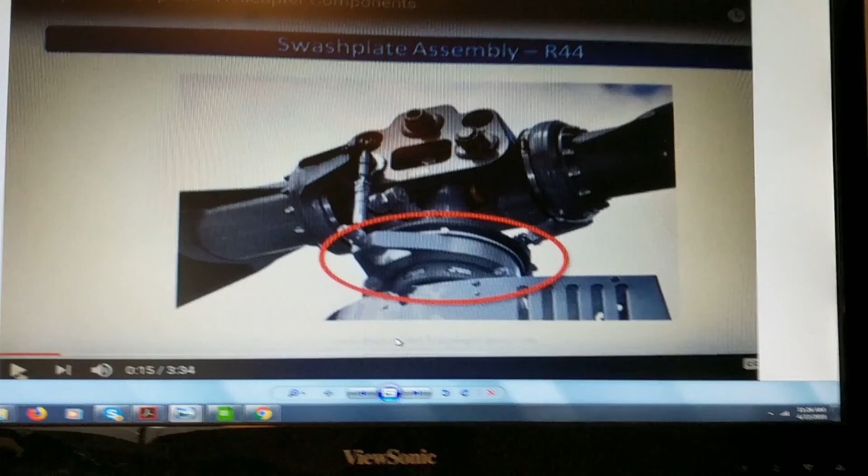So there we are, we got the basics of aerodynamics, and there will be a recap depending on the feedback we get from students. Get on to chat if there's any area that is difficult to understand, and we'll correct that. Also on the list of diagrams, we always move them around and put in new diagrams so they can be understood better. So if the figures don't exactly correspond to what's in the audio, bear with us - it could be that we moved them around, but it won't make it difficult for students to understand or get confused.

I thank you very much, and we will see you in module 2. The title of module 2 is design concepts and tools of drones.